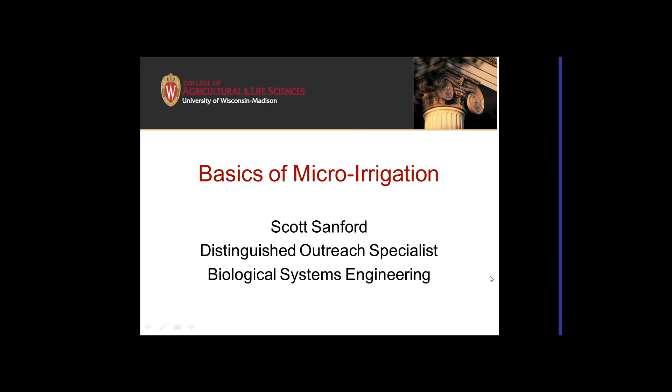All right, now I just got to get to cooperate. There we go. So what is micro irrigation? Basically, it's a method of metering small amounts of water out slowly into the root area, or root zone area, either from the soil surface or directly into the root zone, and that's sometimes called subsurface irrigation, through a network of valves, pipes, tubing, and emitters.

So the pictures here, the top one's just an emitter that you might use in a pot or at a single source point versus a drip line, which you'd use on a row of crops.

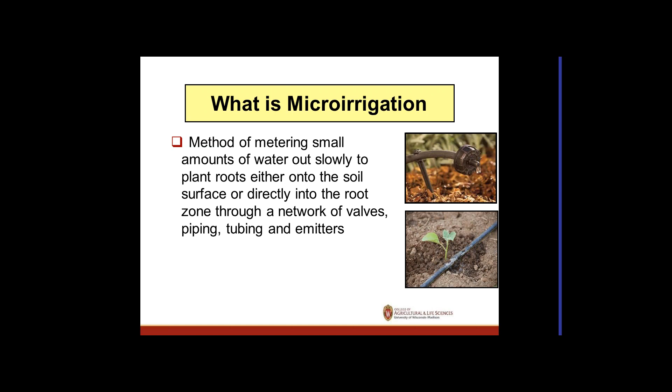So when did this start? Actually, the early research started in Germany in 1860, and I'm not sure what they were using for piping at that point, but the idea was to meter out water slowly to the crops.

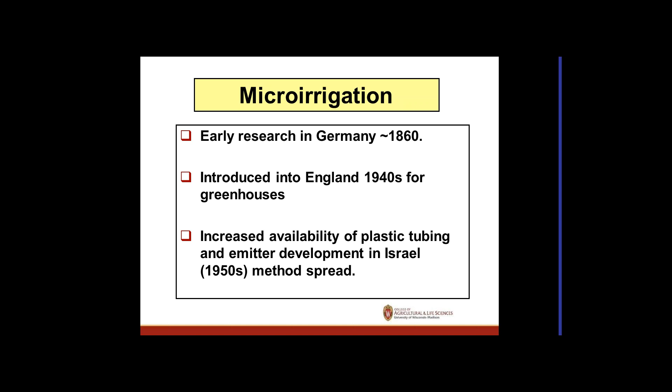It really started to take off in the 1940s in greenhouses in England, and with the development of plastic tubing in the 50s, then it really took off, especially in arid countries like Israel. Israel has really been a leader in the development of drip irrigation, so some of the major companies are from Israel.

So the idea is to meter out water slowly and frequently into the soil, using a low pressure distribution system. These systems typically run at about 10 psi, although they can be up to 60 psi, though that's less common. It might be more common if you're doing a very large field. In most cases, at least in Wisconsin, it's going to be small areas.

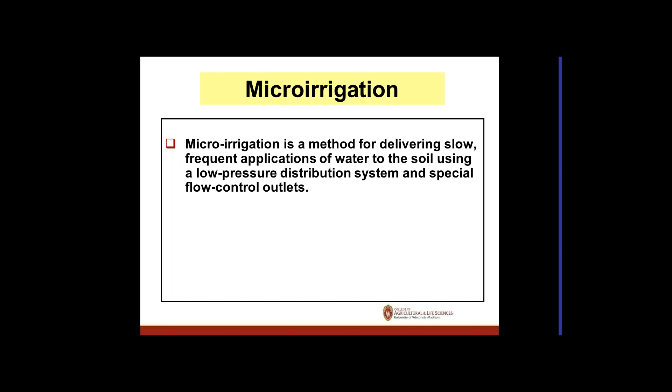And we've got some kind of special flow outlets, and we're going to talk about the emitter part of it and show you what they look like and how they work.

So it's often called drip, or bubblers is another name, but I haven't heard that here as much, or trickle irrigation, and it can also be used as subsurface irrigation. It can be delivered to an individual plant. So if you're in an orchard, or grapes, that's often done, where it's delivered within the root zone of a single plant, or it can be a row of plants.

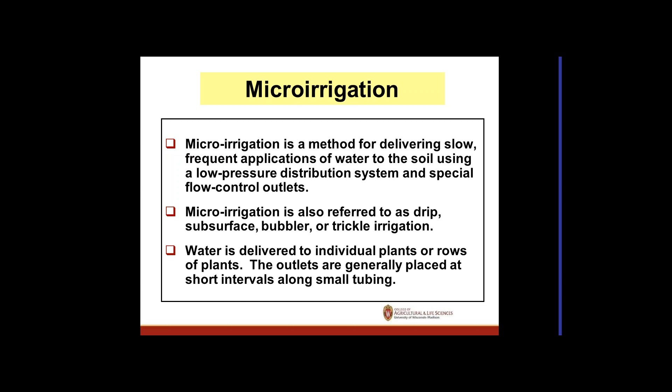And it's very easy to put together. During our workshop this summer, we'll try to have you guys put a simple system together.

So the concept is that we're going to wet the soil near the plant. We're basically just trying to get the root zone wetted. We don't care anything about beyond that, because anything beyond that's kind of a wasted use of our water. So that's the basic concept.

And it's typically on high value crops. You wouldn't see it in Wisconsin on field corn, but basically it's fruits, nuts, grapes, vineyard crops, strawberries - that's a big one - flowers and vegetables.

It does have very high water efficiency use, about 90%, although it can vary a little bit. That has to do with how evenly it puts the water out throughout the emitter strip, and there is a little variation because you're going to have pressure drop down the drip line.

But the big advantage to this is going to be use of water. Basically, because we're not wetting as much area, we can save up to about 50% in water. Although it depends on the crop and how it's laid out. But basically, we're not going to water areas where there's no roots.

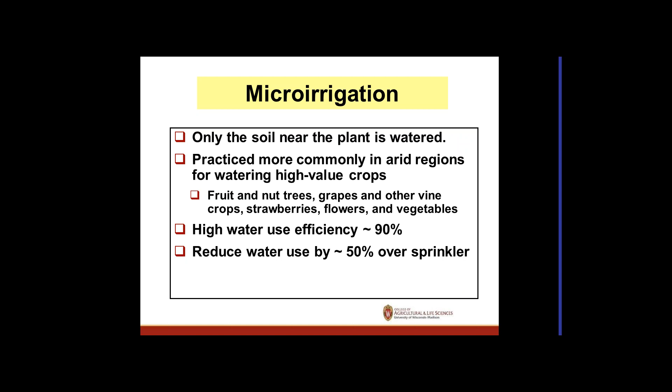So here's some examples. On the left here, we've got an orchard. We have a little micro sprinkler, basically just wetting the diameter where we'd expect the root zone to be. In the lower right, we've got what we typically probably see here in Wisconsin, and this is actually set up in two ways. Let me see if I can get my pointer out here.

So you can see, you got a row here right next to the crop, versus over here, it's down the middle between two crops, and then the next one is down between the two crops. So that's another way to do it.

If you have a crop that has a large root zone that would intersect, you can sometimes just do it between the rows instead of right along the row.

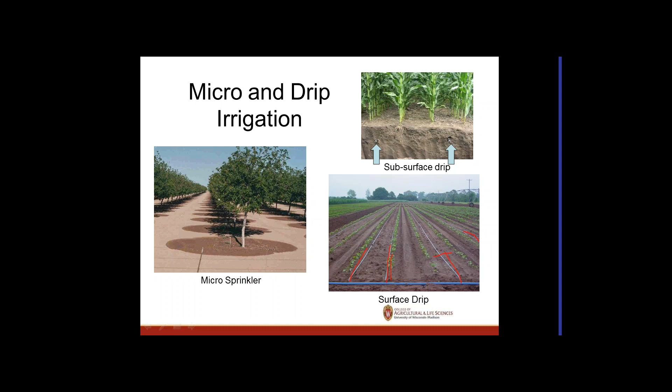In the upper picture here, we've got subsurface irrigation, and I've got the arrows where the pipes are in the ground. This is corn, and we do it every other row. What we're counting on is that early in the season, when we first plant the crop, we're going to have enough water to get it to germinate, and then after that the roots would climb down into that wetted zone to get their water.

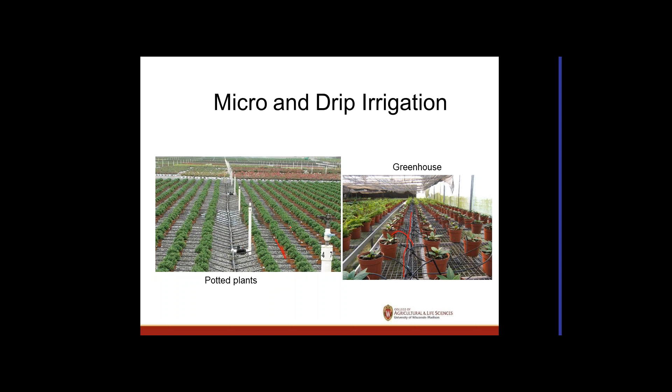So water distribution, the big advantage is over sprinkler. With sprinkler, we're going to wet the whole area, whereas with drip irrigation, we can wet just the root ball, basically.

So what are some of the advantages? Basically, reduced evaporation. We're going to minimize percolation or leaching, and we're going to have consistent root zone moisture. Now, you have to be careful with this method because we can actually get too much water down there and cause root diseases. But if it's done right, we're going to put a little water in, let it dry out a little bit, and then put a little more in. So plants are never in stress.

Generally, depends on what you're comparing to. The labor requirements are lower, and you have higher water efficiency than, say, a sprinkler system. And weeds are more easily controlled.

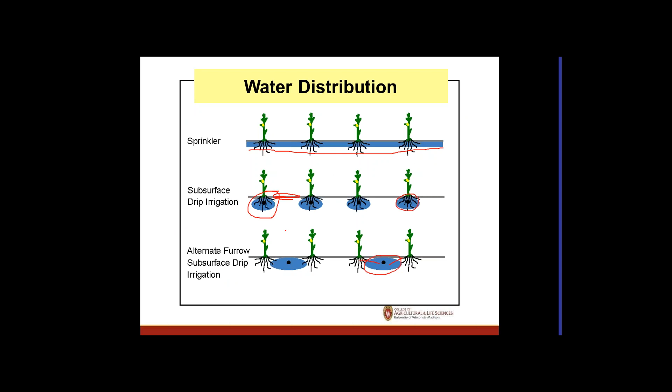Actually, if you have it where you have it right next to the plant, this area in the middle here is going to be dry, and it's going to be really hard for weeds to germinate unless you get some rainfall too. So that can be an advantage from a weed control standpoint.

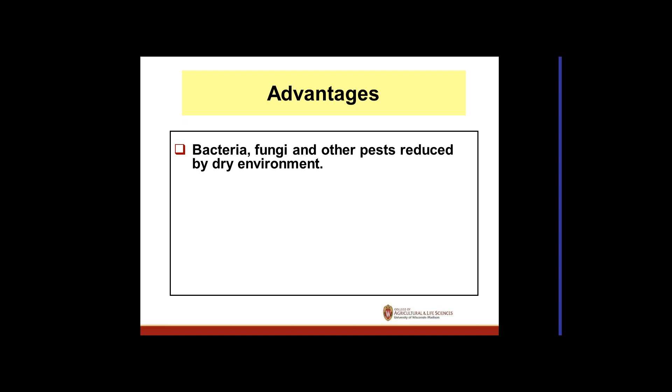You also have some advantages versus getting wetted leaf areas. We can reduce our fungal diseases or bacterial diseases from splashing water up from the soil onto plants because we basically have a dry environment unless we get rainfall.

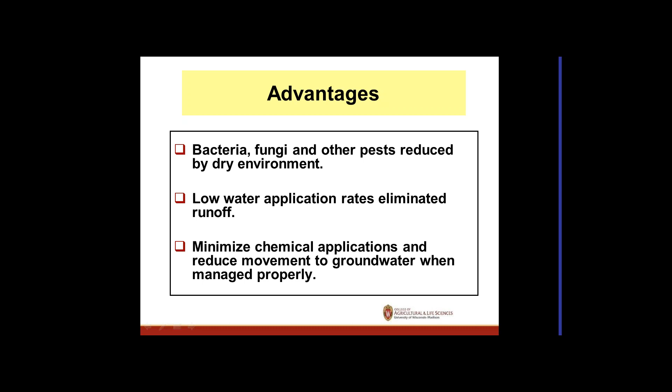Low water application rates eliminate runoff, providing it's managed properly. And we can minimize the use of chemical applications, like doing chemigation or fertilization through it. One thing is we can meter it out as the plant's going to use it, and the other is we can reduce the amount that might get into the groundwater because we're going to meter it out all through the season, instead of conventional agriculture, where you put it on once or twice during the growing season and it's there for the elements to do what they want with it.

Some of the disadvantages: high cost. The estimated cost to do an acre of land is about $1,000 to $1,200. We talked about center pivot irrigation previously, and that was about $1,000 an acre as well. The challenge with this is that $1,000 is only going to last 1 to maybe 3 or 4 years, and then it gets replaced. Subsurface will last a little longer, but generally you're going to end up replacing it more often. So that's a recurring cost versus kind of a one-time cost every 20, 30 years.

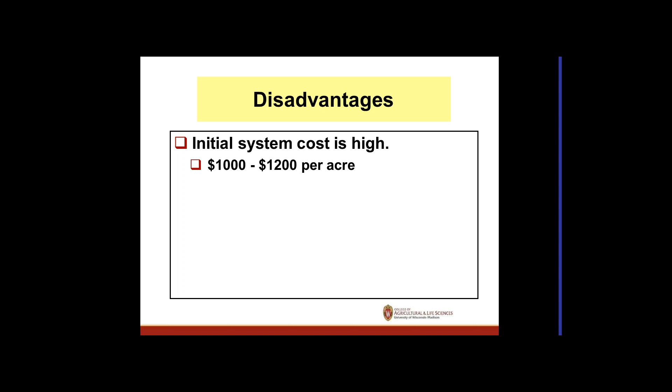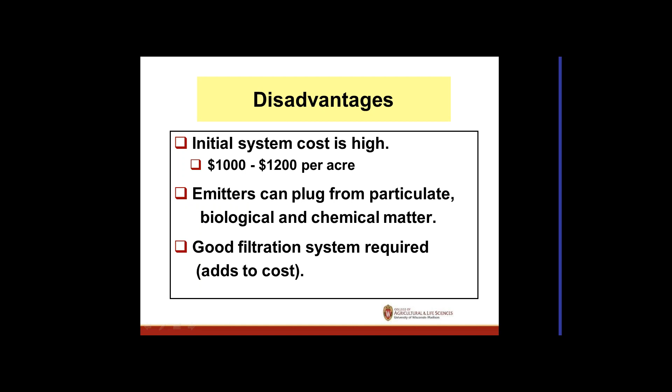We can have problems with emitters plugging with particulate matter, or we can get bacteria growth or algae growth in the tubes, or it can be chemicals. Basically, we can get drying or mineralization on the emitters that plugs them. So we need a good filtration system with this, and that's going to add some cost.

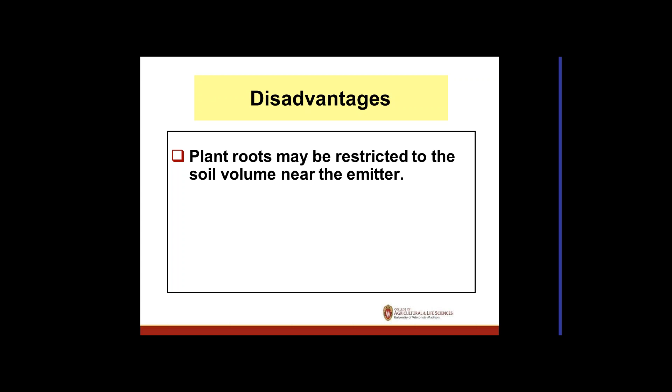But it's not insurmountable. The other disadvantage is it may restrict the plant root zone, or the plant roots may be restricted just to that wetted area if we're in a very arid climate or arid soil, because there's not going to be enough water for it to chase outside of that. So that can be a problem. They kind of get root bound or don't have enough roots to hold up the plant.

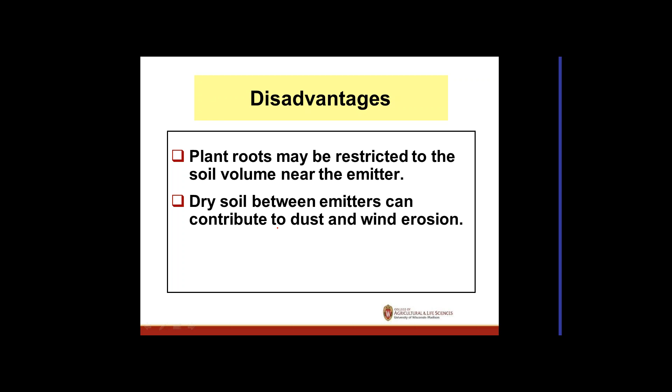The dry soil between emitters is an advantage for weeds, but it's also a disadvantage for dust and wind erosion, although a good crop should help take care of that. We may also need more highly skilled labor to operate and maintain this system, because if you're doing subsurface drip and you've got a leak underground, it takes some skill and problem solving to figure out where the leak is and how to manage it.

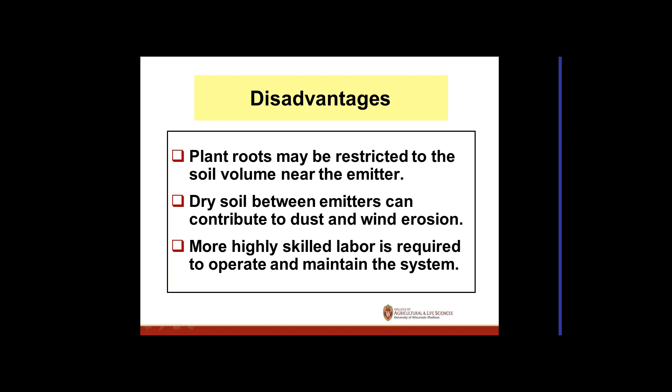It can be expensive to implement on a large scale, although out west they're doing it. I've seen articles where they're doing it on a large scale on onions in Idaho. The challenge is you've got to have it somewhat automated to put your drip lines down when planting, to reduce labor. And if it's a permanent system, like a subsurface one, we may have to drain it so it doesn't freeze and burst pipes in cold weather.

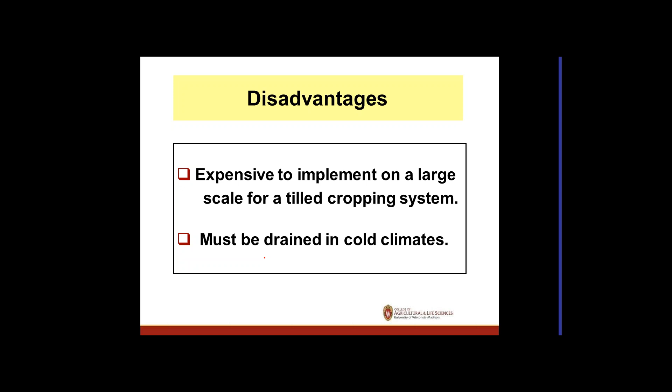When looking at a site to do this, we need to look at what the water system source is, both capacity and pressure, and the level of filtration we're going to need. If it's surface water, we'll need more filtration to get potential algae out than we may need for a well situation.

The texture of the soil will have an effect, mainly on the wetted area and how the water will percolate into the soil and the shape of that wetted area. We'll show a little bit about this in a minute.

We also need to know the potential of the climate, our potential ET, and topography. If we've got a rolling field, that may affect how we lay out a system so that we don't have a lot of pressure differences because of elevation, or we're going to need to use pressure compensating emitters to take that into account, and that may require higher pressure to do that.

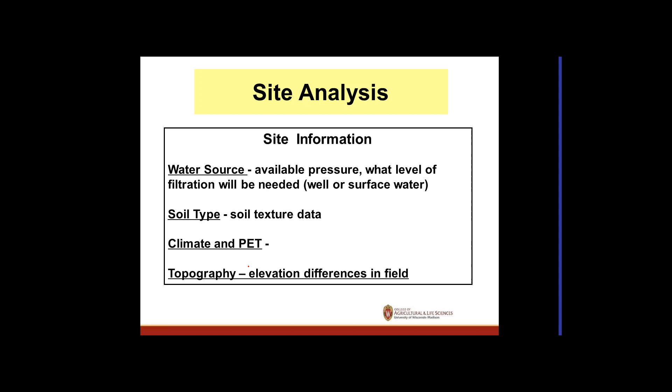So those are all issues we need to take into account when we're looking at the site and how we're going to lay a system out, or what kind of water flow rates we're going to use.

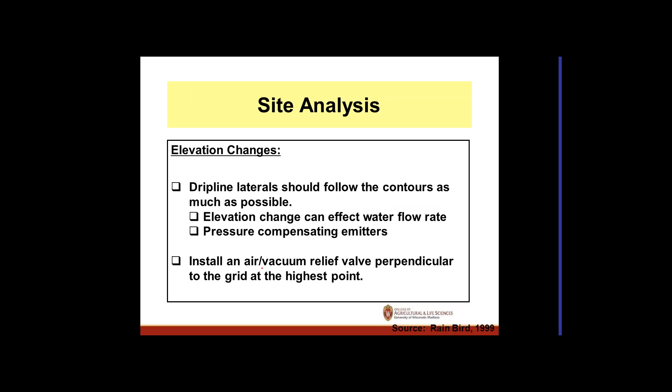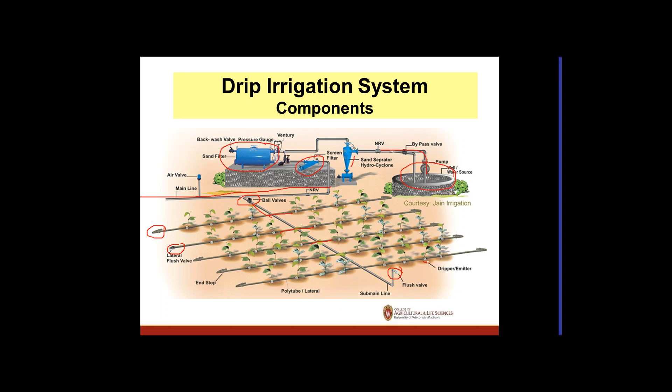So here's an area where we have a valve that we can just open up and flush through, especially the first part of the season or during the season, to flush things out. And here it looks like they've set up with an emitter basically at each plant. So those are the components. We're going to walk through each of these parts in more detail.

Water source: a well is going to be our cleanest. If we use surface water, that may require some extra filtration, because the small emitter orifices plug very easily.

I'm not sure why I wrote pressure required, I'll have to think about that—maybe I got a phone call in the middle of that one. But anyway, yeah, we need to have pressure. We need anywhere from 10 to 60 psi to run one of these systems. You actually can do them on gravity too, you don't necessarily need a pump. In third world nations, often they'll put a little stand up with a tank on it, and with a small system they can meter the water on.

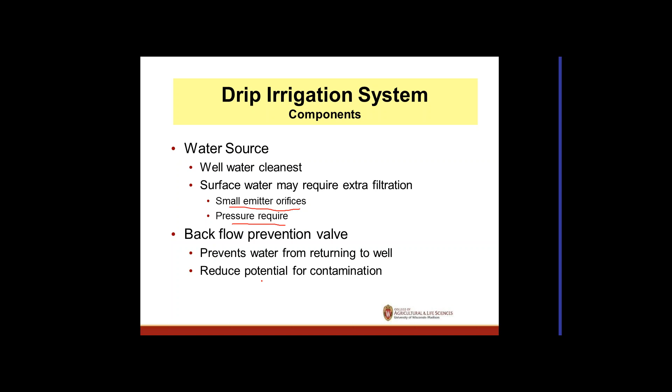A backflow preventer basically prevents water from returning to the well, and it's especially important if we're doing chemigation. So if we're putting out herbicides, pesticides, fertilizers through the drip irrigation, we don't want any of that stuff to have a chance to get back into the water system.

Filtration—we're going to spend a little time on this because it's really important. We want to remove any suspended solids, so on the organic side that can be algae, moss, worms, bug larvae, you name it. If it can get in the water, we need to get it out. Then on the inorganic side, sands, silt particles, mineralizations, minerals that precipitate out—they can be an issue.

We need a minimum filtration level, and when you buy a drip irrigation system it usually states the minimum requirement. Typically 120 is the minimum, but more is better, although more causes some other issues with filtering and back pressure. So 120 to 150 is typically the minimum range, but there are some systems that require up to 200 mesh—we'll look at that in more detail.

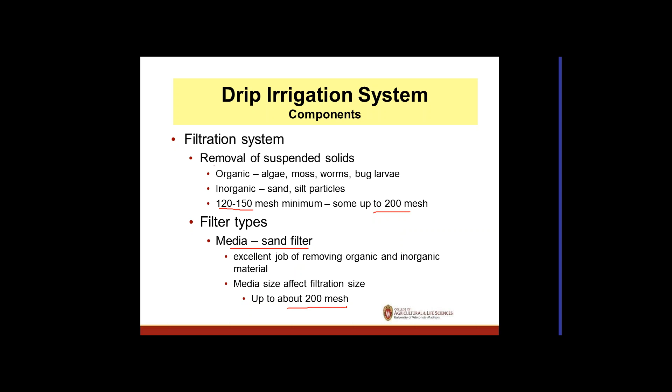We can use a sand filter, which does a great job of removing both organic and inorganic materials. The amount of filtration has to do with the particle size or media size we're using in the filter. They can be set up to automatically backflush and clean themselves, and they can filter to the equivalent of a 200 mesh with the smallest media size.

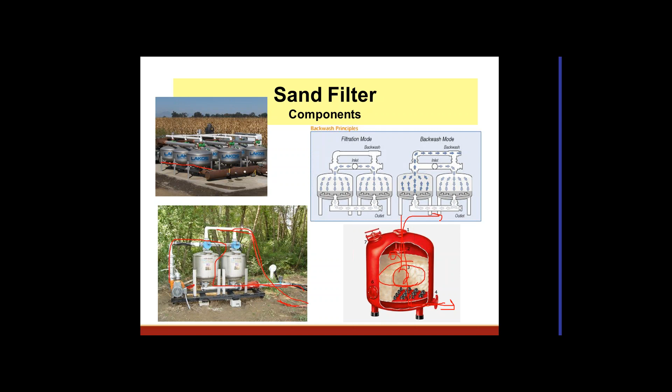So the guts of it—you've got media inside this tank. The normal pattern is the water comes through and through the media, down through and out the bottom. This is basically what they use in swimming pools, if you're not familiar with that. To backflush it, we bring the water back in and up through these little nozzles which agitate or mix up the media, but we bring it in at such a speed that it doesn't push the media out—it backflushes any light particles out of this to clean it. If you've got automated valves and stuff, this can be set up to clean automatically.

The next type of filter we're going to cover is a screen, and this can be an open screen, where we basically just have a screen and run the water over it, letting gravity flow through the screen.

This is particularly good for really dirty water conditions because they can be kind of self-cleaning as time goes on.

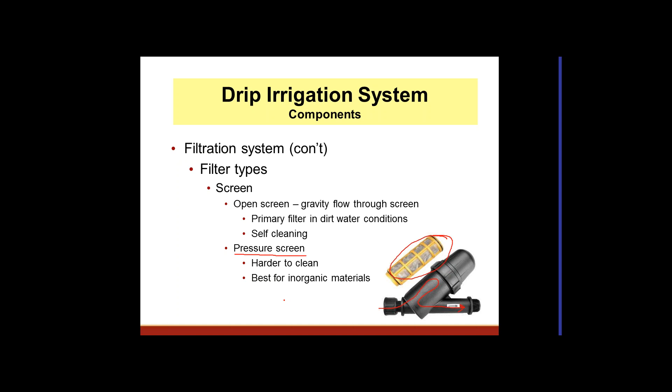The other kind that's more prevalent with small systems is a pressure screen, which is basically in the line. It's got a cartridge in it with a certain mesh screen that fits in here. The water comes in to the outside of the screen, then down and out to the drip line. It works very well for getting inorganic or particulate matter out.

The last type of filter we're going to talk about is a centrifugal type. The water comes in and runs in a circular pattern down through. The heavier particles get thrown to the outside and settle out, and the main part of the water runs through and out the filter.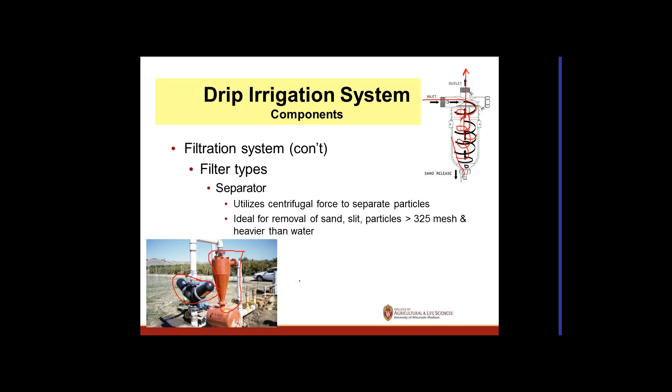So this is what one would look like in the field. This is the centrifugal separator, and here are my pressure screen separators or filters, just to give you an idea of what they look like. It's really good at getting heavier-than-water particles out, but it won't get light particles out. So sand, silt, that kind of particles will get thrown out on one of these separators.

Let's get into the piping systems. We'll talk about the main line. One of the sizing things is that we want to keep our water speed to 5 feet per second, mainly because if you get above 7.5 feet per second, the water velocity head increases and the pressure drop increases rapidly after that. So try to design it to 5 feet per second, and if you expand the system, you've got a little leeway—you can go as high as 7.5 feet per second.

These pipes can be PVC, lay flat—which is the blue stuff, roll-up flat—polytubing, or hose, like garden hose type. All of those can be used.

Here's a picture on the right showing a lay flat tubing, or maybe a heavier tubing, with our lines for our laterals going right into that large line. Over on the side, we've got a lay flat line with little fittings that just plug right into it. This one in the center has a valve on it so you could shut that off, but those are just some different methods of doing that.

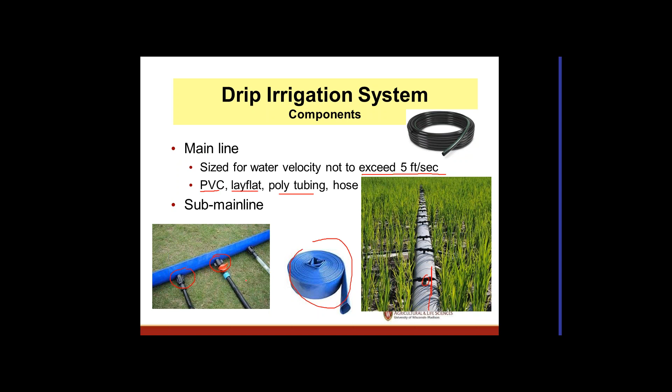And that's the same for sublines too. Then we have the lateral lines.

There are two types, one's called lay flat. They're 5/8 or 7/8 inch in diameter, so it depends on your length of run which would be best. There's a variety of wall thicknesses, and that depends on how long it's going to be out there—5 mils is kind of a throwaway, one year and you're done with it. As you get into maybe 8 to 10 mils, you might use it 2 or 3 seasons. It depends how it's being used, whether it's a perennial crop or under plastic—plastic will help protect it a little bit.

Then there's emitter spacing, which can be anywhere from 4 to 24 inches apart. It's typical on a lay flat tube to have discharge rates anywhere from 2/10 of a gallon per hour to 2 gallons per hour.

So there's actually a wide range of emitter options. The flow rates are given by the ratings on these tubes, because you have to buy them for the flow rate you want—you can't change it once you buy it. Typically they're rated in gallons per hour per 100 feet, or in some cases by emitter, but doing it by 100 feet makes it fairly easy to do calculations later on.

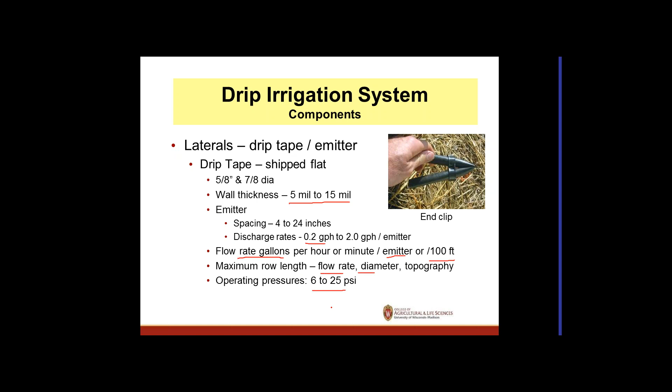The maximum length depends on the flow rate, the diameter, and the topography you've got. The operating pressures can range anywhere from 6 to 25 psi, which largely has to do with the length of run we're going to use.

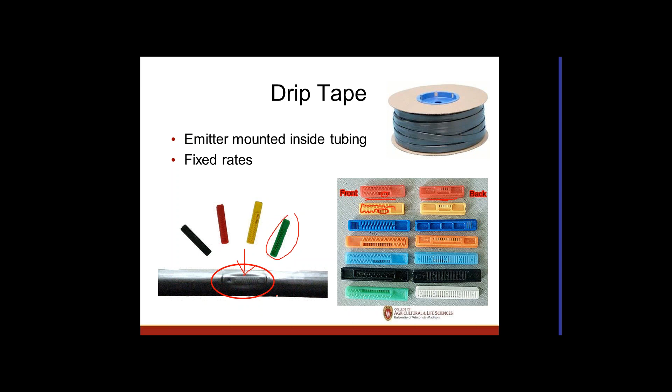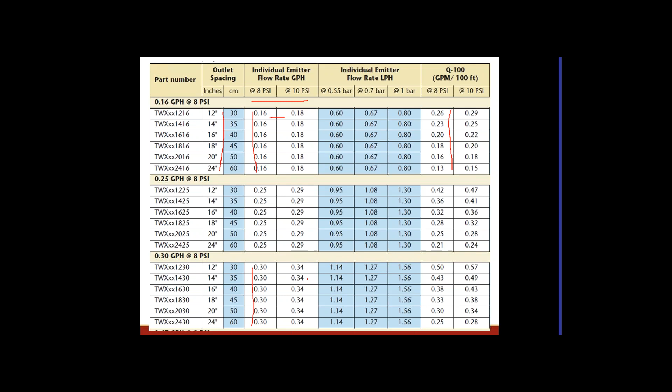So these are, this first column, these are all 0.16 per emitter, and the bottom ones here 0.3 gallons per hour per emitter. So it depends on what your need is as to which you'd buy. The disadvantage, if you buy one that's a little small, you just have to run the system longer hours to get the same amount of water.

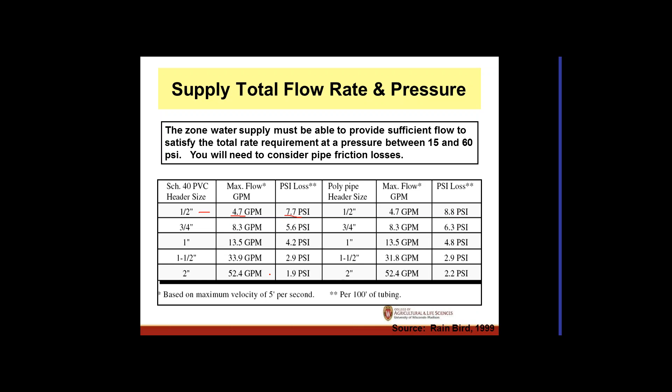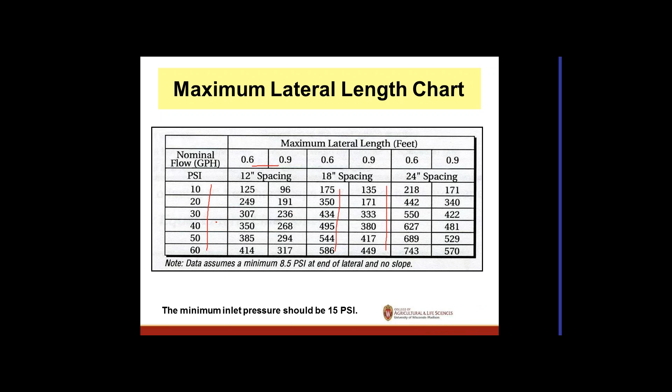So lay flat, the maximum you're going to go is about 25 psi. This rating here, this is going to be for a hard poly tube with emitters, and we're going to show that next. That can go a longer distance.

So some fittings that would be used on tape type. Basically, your tape hose would slide over this and under this fitting, and then the fitting is turned and clamps down onto the tape to hold it. One like this, without that, is meant to go into a poly tube where it just stretches over top of the harder poly tube versus a tape.

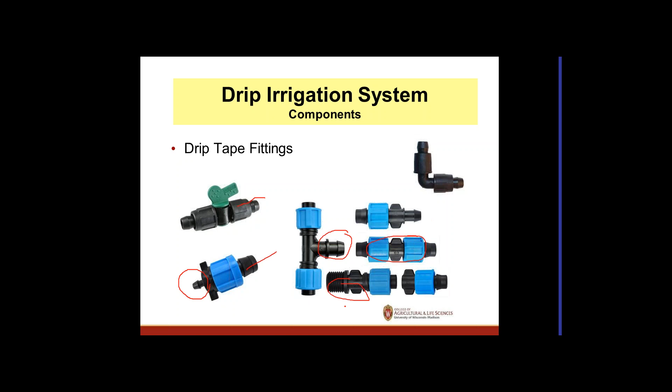This one here, this is one that would go for a lateral, so you punch a little hole in your submain or your main, and this just pushes in, and then this side would have your tape on it. Here's one, this is a mending one or joint. Here's one to go to a threaded line. So all different types depending on what your needs are.

The next type is basically a PVC tube. It's a hard tube, it doesn't lay flat. You can see this has got a little enlarged section, that's where the emitter is. They're put in there as the pipe is molded. So it's thicker walled, it's better for permaculture. So orchard, grapevines, etc., something that will be put out there and they expect it to be used for a long period of time.

If you're going to use them for short periods of time, the advantage of them is they don't kink as easily. The lay flat, when you try to roll them up, they tend to kink, and the kinks are where you get holes. So that's an advantage that way.

So emitter spacing, a wide range of emitter spacings, more toward permaculture, and a wide range of flow rates in gallons per hour, and higher pressures. So this is one thing, that other chart I showed you, I probably should have moved it down. So they can go longer distances per run, although it depends, again, on flow rate, diameter, and topography of the area that you're dealing with.

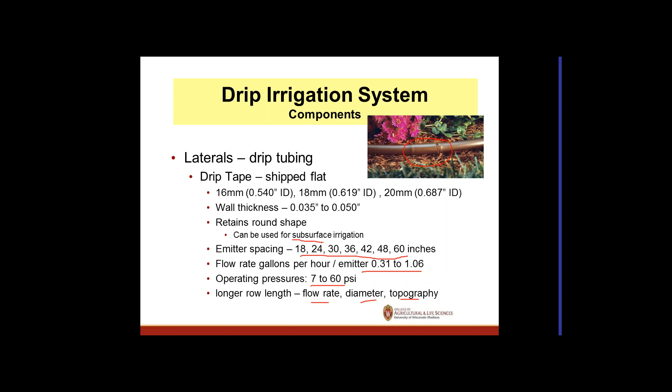And this would be the type of tube that would be used for subsurface irrigation because it's not going to crush when you backfill soil around it.

Types of fittings, there's a number of types up on top, these brown ones. You're just going to push the hose over top and it's going to hold it in place. This is another type where you push the hose in. It's actually got something inside there, a little indent, like this, one on each side. When you push the hose in, it kind of forms around that and makes a seal.

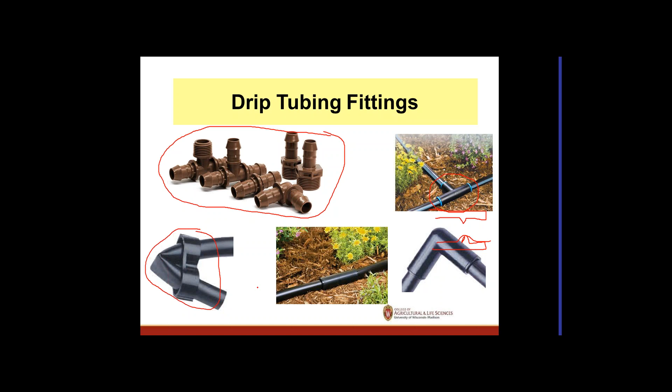Just different designs. Then at the end, to plug it, you can either use an end cap, or you just take these little devices and kink the end so you get a fold and it folds over. Typically with drip irrigation, if we've got a little weeping, we're not too worried about it, especially if it's in the field. Now, sometimes some crops, like strawberries, or maybe cranberries...

Although they tend to use solid set irrigation, you could use for frost protection or cooling these little micro sprinklers. They're also used for orchards. They come in some fancy patterns here, depending on what you're trying to do. So here's one that looks like a little spinner, or a spray nozzle, that puts out a fan of water. Here's one that puts out, looks like 5 or 6 different sprays of water for watering. These are used a lot in landscape irrigation, but they can be used for frost protection.

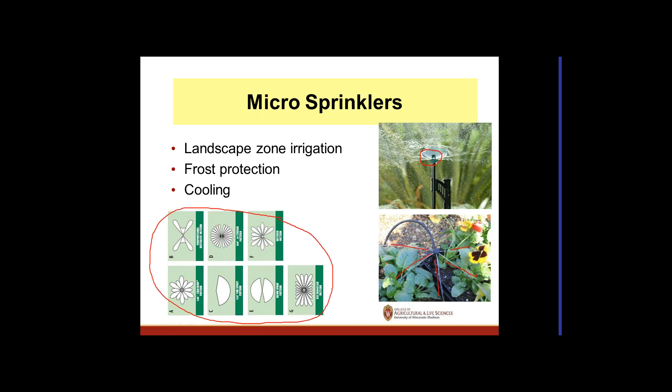And here's a different type. This one's intended for orchards, but you could use it in strawberries for frost protection. This one has a 340-degree pattern, so basically you've got a wedge out. The idea is you've got a wedge out, and here's where the tree is, so it goes around both sides of the tree, that's how they've designed these. This particular model has a 10-degree downward trajectory, basically to help fight wind.

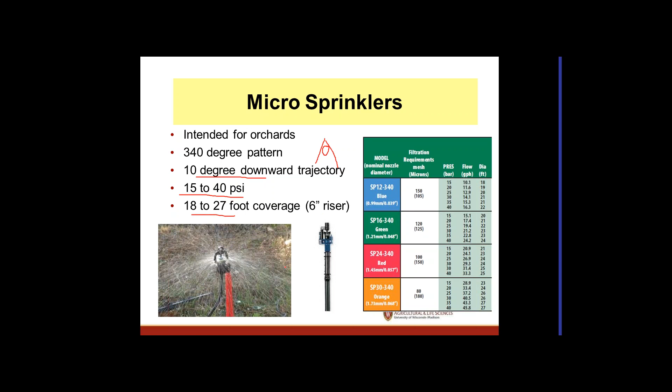That's going to reduce the coverage area, but these do have quite a bit of coverage area, and that's on a 6-inch riser. So they do throw the water out quite far and operate at a pressure of 15 to 40 psi. The higher pressure is going to throw the water out further.

Just an example. Now, we talked about topography and what happens there. Well, in that case, we'd want to use a pressure compensating emitter. You can see that these have very little change, it's pretty flat as far as outcome based on different PSI. So as long as you stay above that 15 PSI mark, they're going to be a fairly flat pattern. These are typically used with the drip tubing versus the flat tape type tubing. But here shows another one too. Here again, these are fairly flat.

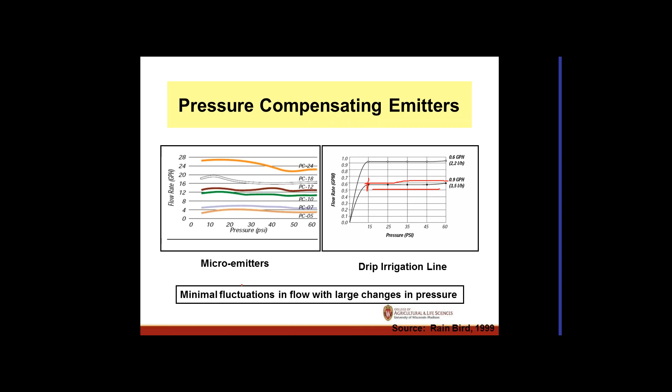So some optional equipment that we might use with drip irrigation or trickle is some kind of controller. These can be a time clock, or it can be soil moisture controlled to turn on and off the water. Some controllers, for lawns especially, have moisture sensors to sense whether it's raining, so they're not irrigating when it's raining. These can be turned off by time, water volume, or clock time. It just depends on the system.

But here's a simple one that might be used for a small farm or a landscape type thing, where you do simple programming in. Flow meters can be very handy, especially if you put them on different zones, and it can help you detect leaks. So you put the system together, you start it up, make sure everything's working, and you look at the flow rate, so you know what the flow rate is. At some time down the line, if you see the flow is less, then you know you possibly have plugged emitters. On the other hand, if it's greater, then you know you probably have a leak. So it's one of those tools in the line that can help you troubleshoot. It also tells you how much water you're using per year, per irrigation event.

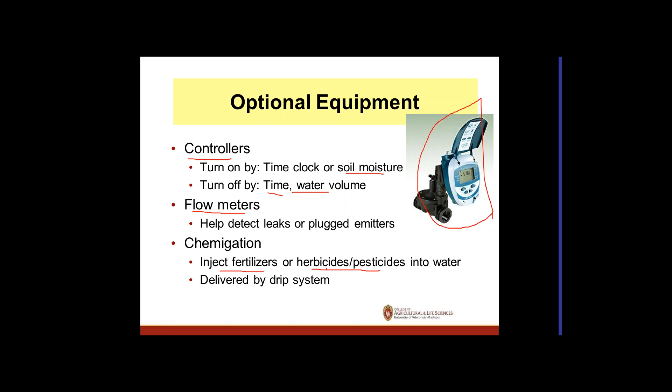Chemigation, I've alluded to this earlier. We can inject fertilizers or herbicides, pesticides into the water. Basically, if it's herbicides or pesticides, it's typically systemic type stuff, because with drip you're not going to have a very big wetted pattern. But fertilizers is the biggest one that they would put into the system and deliver with the drip irrigation. One of the things, if I do use chemigation, we want to make sure that product is flushed completely out of the drip line before I turn it off.

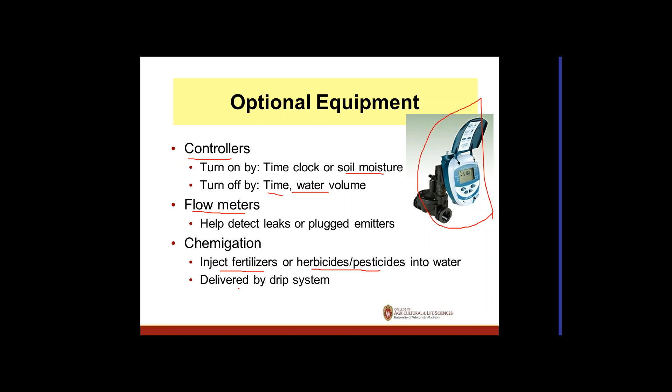Otherwise, fertilizer left in the line can cause bacteria growth, or it can cause crusting or plugging of the emitters as the salts dry at the emitter. So that can be an issue.

So here's a simple setup, for like a home garden or a small scale situation. We've got our water source, a vacuum breaker which is basically our non-return valve, a pressure regulator to reduce the pressure coming out of the system, a little adapter, our drip filter which is a pressure filter, and then an adapter to take my polytube and convert it from a threaded fitting to my polytube fitting.

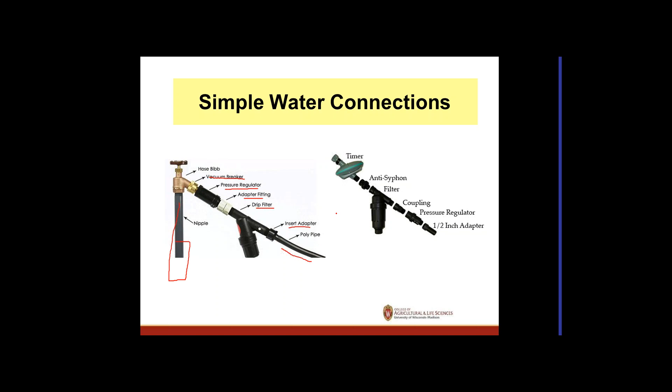The one on the right is the same thing, except I've put a timer in the line as part of that. So that can be a very simple system.

Some maintenance: we need to flush the lines on occasion to get any particulate matter out that made it through the filters, so we get longer life on it. Once or twice a year typically is enough. We also need to clean our filters, probably a weekly or bi-weekly thing.

We also have to watch for plugged emitters, and if they do become plugged, we have to try to clean them. Sometimes it's roots trying to feed into there, sometimes it's minerals. So we may even have to put a herbicide out there to kill the roots or burn the roots off, or some kind of chlorine or acid, which will either burn the roots off or help with dissolving the minerals and flushing them out of the system.

And I already mentioned chemigation, trying to flush that out. One of the biggest challenges with permaculture and any kind of irrigation, but especially drip irrigation, is control of salts in the soils. A lot of crops are very susceptible to salt buildup in the soil. So we either need to flush the soil, basically create a leaching event to move the salts down through the soil profile, or do crop rotation to help with that.

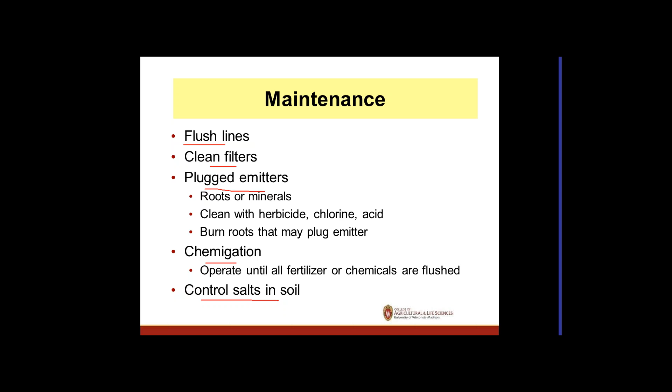So one of the things in the design of our system is to know what the rooting habits are of the crop we're trying to feed. Here's a pictorial out of the USDA manual on irrigation. You can go from corn, which has a very large root ball, to something like spinach or strawberries, which is pretty small and not very deep.

So we've got to look at the type of crop we're growing, to look at the number of emitter lines we might need, and based on the soil type, the shape of the wetted area and the location of those emitters.

If we're doing under mulch, like a plastic mulch type setup, we often will put a drip line there, and we need to look at where the drip line goes versus where we're going to plant, so we don't come through and take our drip line out in the process of planting. Typically the drip line will be offset if you're planting down the center, or it might be down the center if you're planting double row in the mulch.

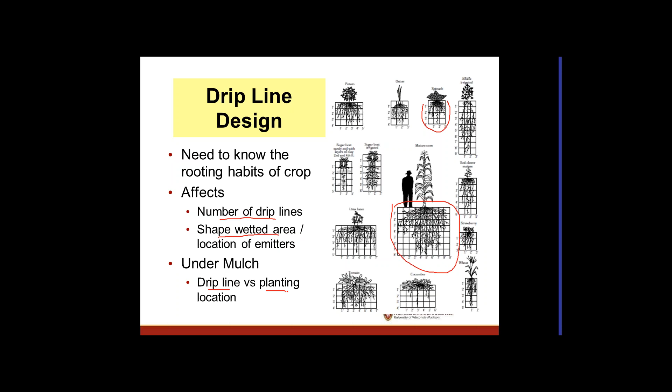The emitter spacing will also have to do with the soil and the wetted area we're trying to achieve. It also has to do with the amount of time we run the system, which is a management issue.

One thing to realize, as I'm going over on the right here with this picture, is it tries to show you the number of minutes of irrigation and how far that water is going to travel. This has an effect on knowing the depth of the root ball or root zone and how far or how fast that water is going to move down through it.

So the temptation sometimes for people is to water a little bit multiple times a day. Well, if you do that, you may end up with a very wet area up top for crops that can actually withstand a much deeper root ball. So we need to understand the size of that root ball and how fast the water moves down through that soil profile to match that to our irrigation timing.

The other thing is the emitter spacing. We have close spacing, which is typically used on row crops. We can go with a much shorter time than if we have a much wider spacing and we try to go with a shorter time.

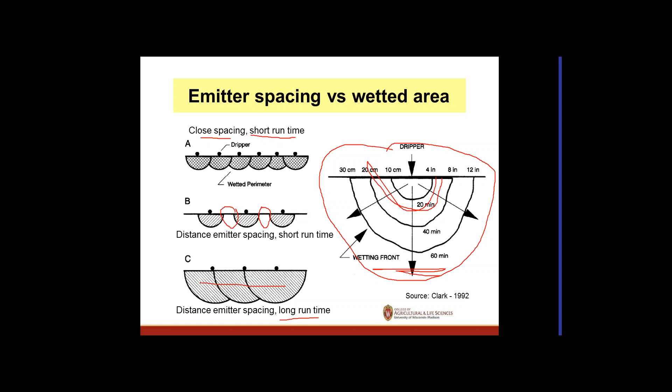So let's get into the water management side of this. There's a couple different ways we can do this. We can do soil moisture-based scheduling, so basically we put in some soil moisture sensors in the soil to monitor how wet or dry that soil is. And then we can use the checkbook method. There's limitations on both of these.

Even using the checkbook method with drip irrigation, we're not wetting the whole profile, so there's some unknown or some challenges there in understanding how that water is percolating into the soil and how big a pattern it's making. So basically we can overcome some of these limitations by using both.

The other question that was raised is plastic mulch. The assumption is that if you have plastic mulch, you'll use less water, and that's probably true to a certain extent, but it's usually not enough to affect our water use. Now, it would provide less drying near the surface because you're going to get some evaporation out of the soil. It'll condense on the bottom of the plastic and keep the soil wetted up near the top a little better.

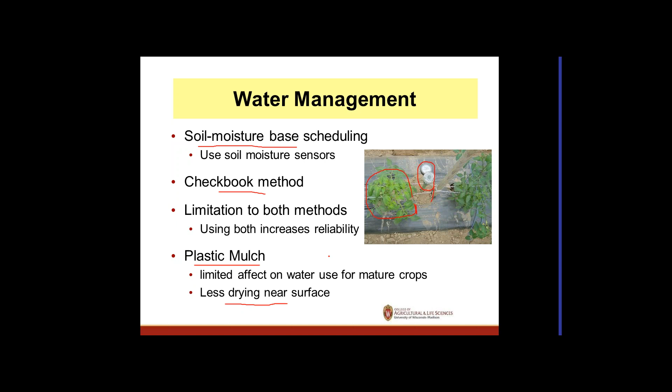But it also can be a detriment because, as a grower, we may not be able to tell how wet the soil is underneath that plastic - how wet the trickle irrigation has made that. So using a soil moisture sensor is a good way to help understand how big the water pattern is and how far it's going.

So how are we going to do this? One method we're going to use in Wisconsin, we can still use our canopy coverage - that's a good estimate. Although if we have trellis crops like a tomato plant, it may underestimate water use. So that's going to be some experience. I haven't been able to find anything that definitively gives some recommendations on trellis crops, but they did note that they will tend to underestimate water use, especially when the crop is mature.

The other is effective rainfall. With sprinkler irrigation, we use about 1/4 inch. We don't count that with drip irrigation. The recommendation is 1/10 of an inch of water doesn't count. I'm not sure, and it could be that this is because of the region that came out of, but that's something else to look at as to whether that's a good number.

But some variation - then we've got non-uniformity factors. So that variation is water distribution along the drip tape, and basically it's 1.1 to 1.2. It's kind of one of those estimated factors. If you really want to go out there and figure it out, you can go out and take your drip tape and put up some cups under the drip tape along the length of it, and try to figure out what the distribution is to get a better educated guess on what that number should be.

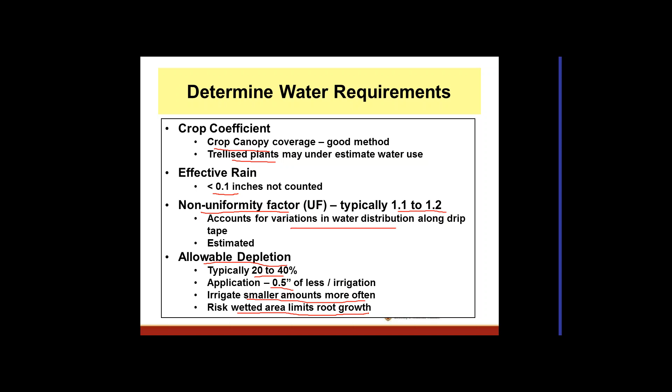So smaller amounts more often, but if we do too small amounts, we risk limiting root growth to just that wetted area. Typically in Wisconsin, because we're not that arid, that's probably not an issue unless we're in a drought year, but that can be a factor.

Our canopy cover is one of the things we can use with our irrigation scheduling. You look at what the maximum canopy width is and the row width, and put it in the formula to get row width over canopy width.

Oops, I got that formula upside down - it must have been too late when I was doing this. So we're going to flip this formula around. It should be the canopy width over the row width, giving us a percentage, something less than 1, that we're going to use.

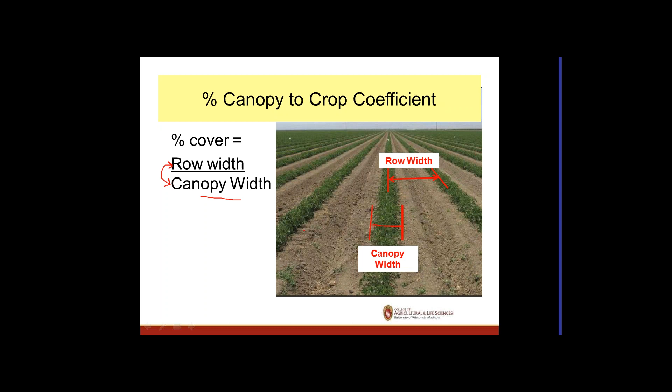Then we take that and go into this table from the A3600 publication, Irrigation Management in Wisconsin. Say we had 0.22 potential ET, and we've got say a 60% cover. We'd go down here and find the adjusted number is 0.19. That's how we'd use that to get that.

When we're applying this to determine what the ET would be, we'd basically do what I just did - look up those numbers. Then we need to use this non-uniformity number, which is going to be 1 to 1.1 to 1.2. We can take that and convert it to quantity of water.

This is going to help us decide how much water we need to put on. We're going to take that ET applied - that's this number here - after we take our adjusted ET, times it by the uniformity factor, so that's like the 1.1, and we'll get a number there. Then we times that by the gallons per acre inch times the wetted area to get the gallons used.

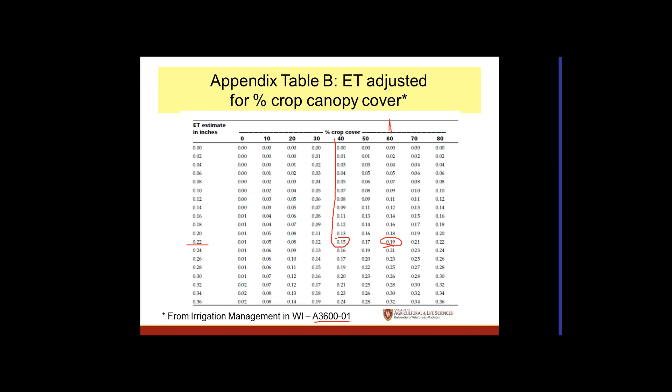Here's an example. Here's my 0.22 - I did 40% cover, 90% uniformity. So if we go to the table, 0.22, we go over to 40%, come down, here's my 0.15. Then we take that and times it by the 1.1 for our 90% uniformity, and we get 0.165.

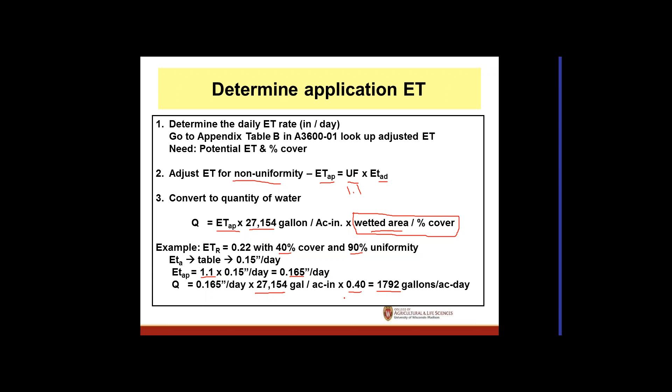Then we take that and convert it into gallons - here's my percent cover again - and we're going to need 1,792 gallons of water per acre per day to replace the ET for that amount of ET.

Then the other thing is to look at the flow rate, so we can calculate the time it takes for our system. We need to determine the drip rate: the number of drip lines times the rate per 100 feet to get gallons per 100 foot. We need to know the linear feet of row, so we take our acres of field divided by the row width to get the linear length for an acre of field - it might be less than that if we're only doing part acres, but we'll do it on a per acre basis.

Then we take our flow quantity coming from our drip line and times it by the linear length on a per 100 foot basis to get the total quantity of water we can supply in that line on a per acre per hour basis. These drip lines - I should fix this, it should be gallons per hour, I'll have to fix that before I post it.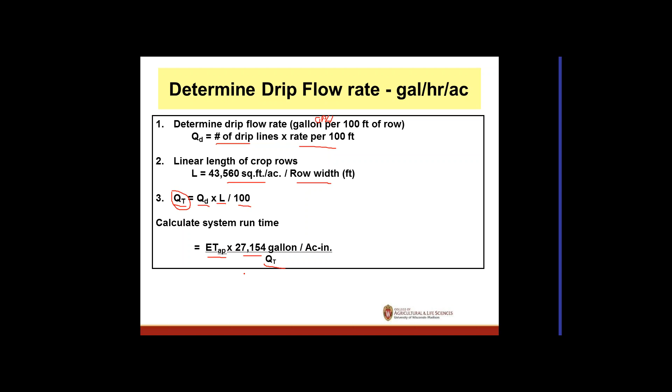So here's an example. If I've got tomatoes with 36-inch spacing, 2 drip lines at 20 gallons per hour total, that's 2 drip lines times 10 gallons per hour per 100 foot.

That gives me 20 gallons per hour per 100 foot. For my linear length, I take my square footage per acre divided by 3, giving me 14,520 linear feet of row in that acre. I take my 20 gallons per 100 feet times my linear foot, divided by 100 to get it on a per-100-foot basis.

That gives 2,904 gallons per hour per acre of water available. So if I put that in here, I find I've got to irrigate for 0.62 hours, or 38 minutes per day, to replace the water based on that ET.

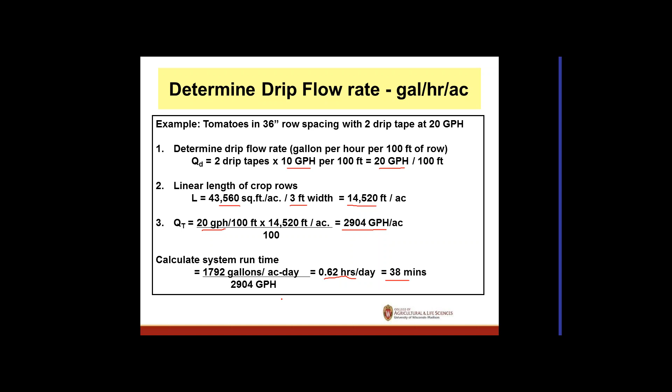So the next question becomes: how much ET can I tolerate before irrigating? Typically it's about 25%, so that's my allowable depletion. Basically, you calculate this by taking your effective root depth, the water holding capacity of the soil, and the fraction of the soil that's wetted, which we'll calculate. That gives us the maximum inches of ET before I want to irrigate, between irrigation events.

My fraction of the wetted volume of soil will depend on the soil type. We'll use an example here of 30-inch rows, 18-inch rooting depth, and 1.8 inches of water per foot in soil holding capacity, with a loamy sand soil.

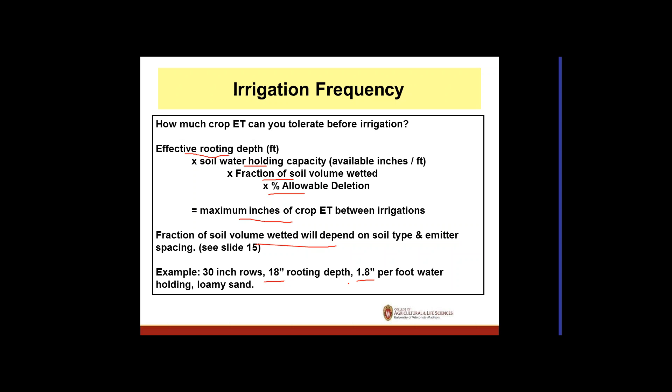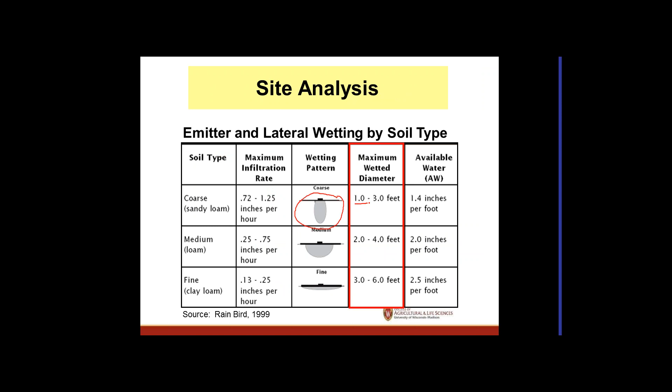So if I look at my patterns here, loamy sand is right in here. I think I picked a 1 or 2 foot diameter - let's see what I picked. So I'm assuming a 24-inch wetted diameter.

I'm assuming that's a cylinder in the soil under the emitter. The formula for a cylinder is pi times d divided by 2, so the radius squared - that's the area of a circle - times the rooting depth. Pi is 22/7, an easy number, instead of 3.14 and so on. If I put that in, I end up with 8,146 cubic inches of soil.

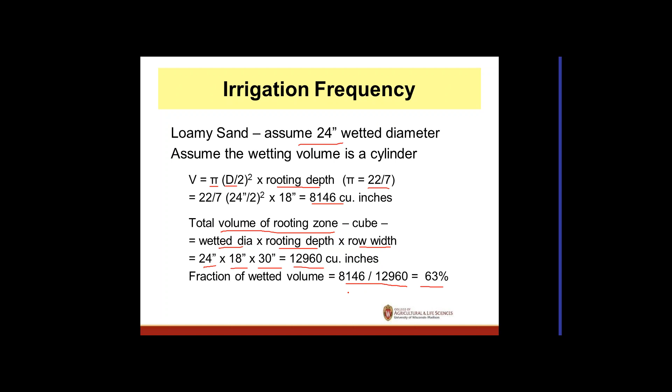Then I need to calculate the total volume of soil that might be in that area. So I've got my wetted diameter times rooting depth times the row width - basically a cylinder or a cube. That's 24 times 18 times 30, giving me 12,960 cubic inches. If I put that into a formula, I find I've got 63% wetted volume out of all that soil.

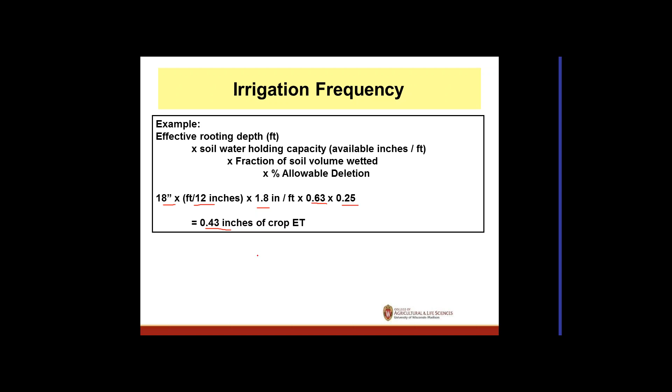Then I can use that in my formula. My effective rooting depth is 18 inches, which I convert to feet. My soil holding capacity is 1.8 inches per foot. With my wetted volume fraction and my allowable depletion at 25%, that brings up 0.43 inches of crop ET. Basically, that would be my set point for starting irrigation, or somewhere in that neighborhood.

So what are some grower trends here? One would be overwatering under mulch - I know I found myself doing this because you really can't see what's going on, you can't see how wet the soil is. So using soil moisture sensors can help with that. They can help define the wetted volume or wetted area, and help determine when the soil is actually depleted. So soil moisture sensors can be a real asset when we're looking at microirrigation.